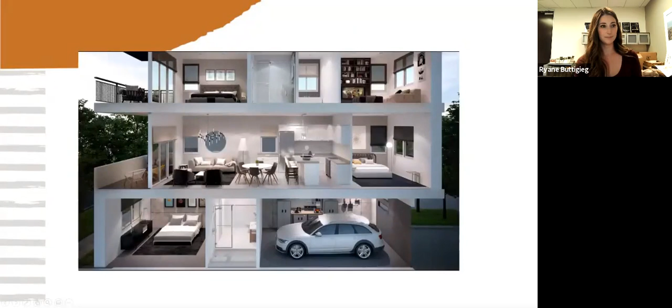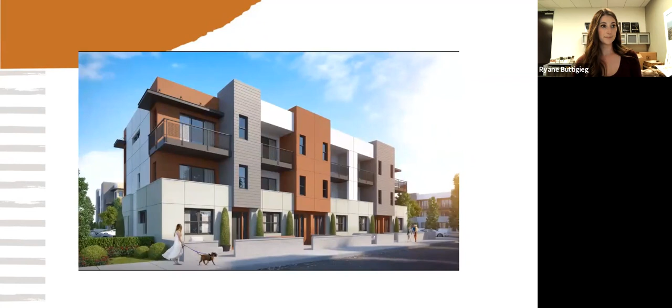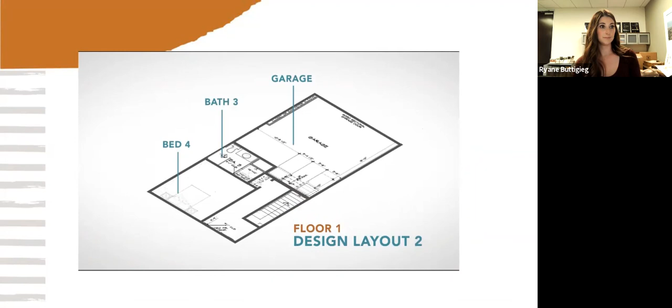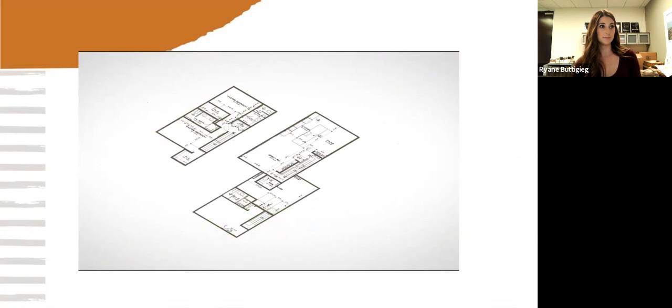We all have that perfect idea of home, a combination of this kitchen, that layout, every room and floor just how you picture it. Now imagine if you could actually have it. That's where Trumark Homes comes in. Introducing Truflex, a new design layout concept that's only available at West Village, Trumark's newest neighborhood, consisting of 62 townhomes coming to Central Park Village, just minutes from downtown Brea. It's what we call the convenience of choice. With no set floor plans, creating the home of your dreams is as simple as selecting a design layout for each floor. In other words, you can customize and build a home in your vision. That means no waiting for a new sales release to find your plan of choice, and a unique opportunity to get exactly what you pay for. Here's how it works. Step 1: select your first floor Truflex design layout from 2 options. Next, choose from 3 Truflex design layouts for your second floor. Then make the final decision for your third floor layout, choosing between 4 distinct Truflex design options. That's 24 different ways to create your dream home, in this exciting location minutes from stunning parks, trails, and prime shopping and dining spots. And it's all in your hands. It's our way of letting you embrace the side of yourself that lives boldly, and it starts with making your home yours. To learn more about these exciting customizable townhomes, please visit our website at westvillagebrea.com and join the priority registration list to be the first to receive updates on construction, product, and special events.

All right, okay, okay great. So let's start with the basics, because you have to understand the basics here to kind of follow along with what Carola, who's going to present the marketing and programming component, and then Rob, who's our ops guy, is going to talk about the construction part of it. The construction part's really important, but what you're seeing there is effectively the project being half built. You can see the part that's being built. And like a lot of the communities that we've done at Trumark, a lot of them are infill. We use a lot of words you guys have already heard, but we're going to get to the texture behind some of these words.

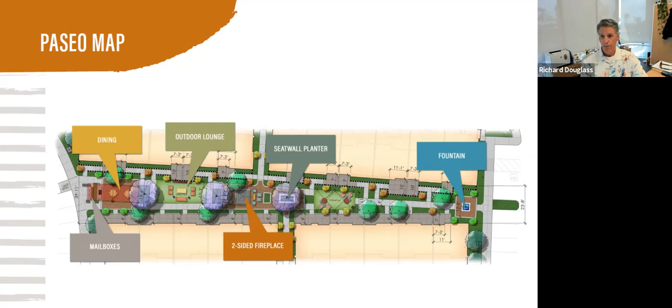Actually, one of the things that's on here that's not there, there's a picture of the paseo. I mean, it's cool, you guys see a lot of pictures. I'm not saying it's not cool in any way. The real thing we're talking about that you guys should be interested in is just how we put this product together. Now, I will add, if we go back to the site plan real quick, so go backwards.

Sorry, Ryan. The other thing we did here, again, modularized, panelized, on the upper right-hand corner where it says stacked flats. Those are affordable, moderate priced within the city of Brea. And we got 27 units per acre on those, and they're flats. Those are not a modular design, but they're still panelized.

So anyway, I'm kind of setting up Carola to talk about the programming here. Again, going back away from the stack flats into the yellow, oranges, greens, a standard 6-unit, 5-unit side-by-side townhomes. Every one of those little boxes you see there are the same exact size, same exact module. And yet when you walk in and she'll walk you through them, they're completely different in how they live and how they're infrastructured. That's for Carola and Rob to explain to you.

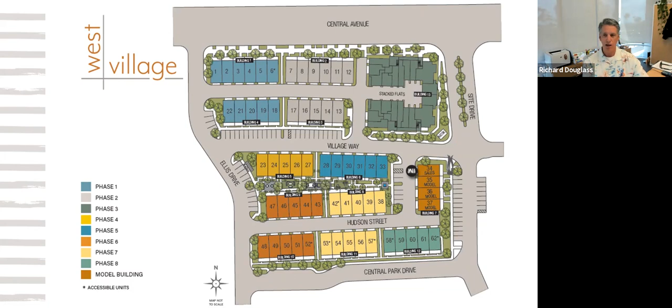But I'll start with something that was very difficult that we wanted to simplify and make it totally cool. That was the objective. Carol.

Thanks, Richard. So we talked about, somebody asked me the other day, well, how difficult was this to explain to the customers? It was a bit challenging to explain, but when we all sat together we said, well, how are we going to sell 62 homes that are identical? We thought, okay, we're going to have to figure out a way to differentiate them.

We had to change, and Rob will explain that, the thought process of the whole industry, basically, of all our vendors, our subs, and even within us, because we actually had 9 floor plans. There was no longer plan 1, plan 2, plan 3. We actually had 9 floor plans, and each buyer purchased 3 floor plans. So when we sat down with them, that was exactly what we did.

We sat down with them and said, okay, on floor 1, sorry about that, Ryan, you have 2 choices. You either have, which is pretty similar to every other 3-story town you ever see, the den or the bedroom. Now, another thing you'll notice in any of these plans is we have no ducts, because in order to be able to change, we had to do individual air conditioning units.

Rob can explain a bit more about that, because if not, we couldn't have changed the ducts, since we couldn't change the configurations. As you got to the second floor, people were able to choose, if they preferred, the kitchen at the front with the deck, or the great room at the front with the deck.

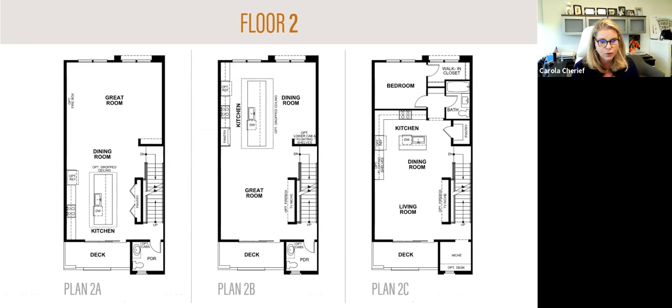So people really got excited about this, and were happy once they understood what it was, and they understood we were probably the only ones in the market doing such a thing.

What was also interesting, and difficult at the same time, for the salespeople and all the options, was that we priced these floors like they were options. We had no base price. We had a base price per floor that was actually entered into the system as an option.

That's how we priced the floor. So the salespeople had to know every time to go into the system, click on the options, and that would automatically give them the price of the entire floor plan they had chosen.

Another little problem we had was bedroom limits from the cities, because you can't just have as many bedrooms as you want. So they had to count per phase how many bedrooms they were selling. Luckily, by the end of the neighborhood, we sold out of all the homes and had only 1 bedroom left over.

So we did pretty much what we were supposed to do for the bedroom limitations. But that's something we had to think about up front, because if somebody had come in and sold only 4-bedroom or 5-bedroom homes, we would have run out, and in the end only been able to sell 1-bedroom homes. So we watched that very closely.

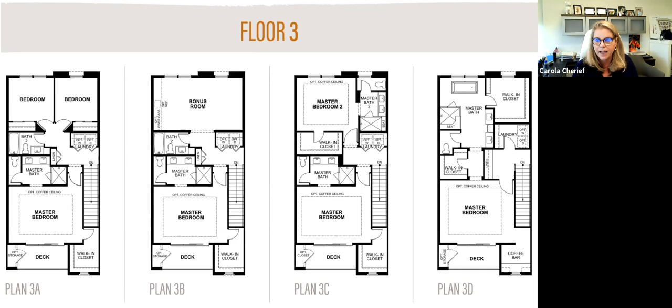Let me jump in real quick, maybe to set Rob up a little, just as an example. One of the principles here that we wanted to adhere to was having the infrastructure to do everything Carola just said — in other words, where the electrical plugs go, the plumbing goes, and everything else.

We basically said we're going to create an infrastructure plan to the most complex of these designs. For example, if you look at plan 3B on the top left, it's got the bonus room, and plan 3D has master baths and showers — there's infrastructure there. So in the case of some of this, Rob can explain, as long as we do the most complex plumbing plan first, with 84 or 94 examples of that, even though it's probably more than you'd ever want to do, we can tell the plumbers you're only going to make this one complex thing one time, and then it's repeatable.

And if there's plumbing behind those walls, we'll just bury them, in case someday someone comes back to retrofit their home and do whatever, subject to the parking and bedroom count. So the trick in all this is being able to pre-program as much of the infrastructure as possible so you can flex it a lot of different ways.

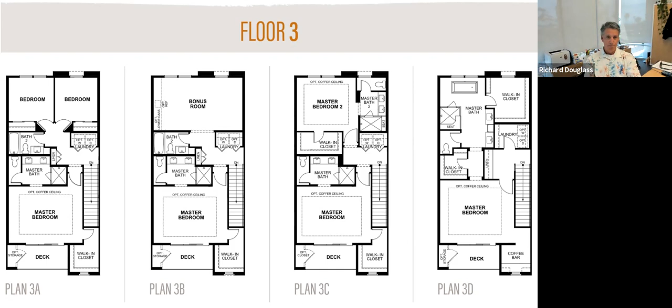So that sets us up. Oh, Rob, why don't you take it over? Okay.

To piggyback on everything that's been talked about, one of the challenges we have in Southern California is that municipalities want us to pre-plot all of our building units as part of the master plan, and then we're stuck with building that. So we have to have this crystal ball that tells us how many homes with 3, 4, or 5 bedrooms we need, and we get these approved years before we actually build, by which time the market changes. Usually most of us builders will have 3 to 5 floor plans, and one or two of them are a dog, and we end up discounting them to get rid of them because the market's changed from our original survey to when we actually build.

So part of the challenge of making these modular was to offer different configurations anywhere from 1 bedroom to 5 bedroom, without changing the exterior of the building. The city of Brea was very involved in the look of the exterior, so once we determined what it would look like, we couldn't change it from building to building along with the floor plans.

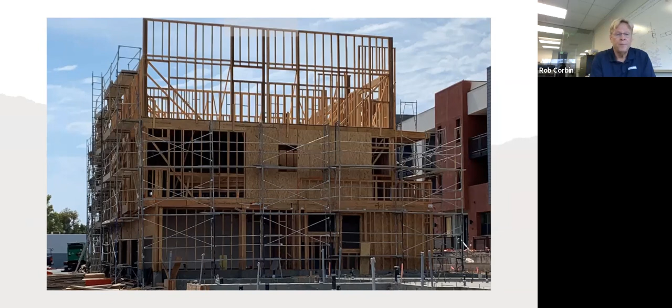And this did a number of things. The most important thing, and we've got, you can play this video, you can kind of see how efficient it is going up. You can play it and I'll just talk over it.

What it did was, normally when you start a building, you have a layout guy go out there and he lays down all the plate and marks where all the stud locations and all the cripples and all the jack studs and jam studs. And it's not always done consistently.

If my framer has a rough weekend, he might start on the left side one time and work towards the right, or he might start on the right side and work towards the left. And what that does is it changes your stud cavities.

So panelizing them, doing it offsite and doing it on a computerized basis, all of those interior partitions are consistent. We always knew that there'd be certain stud cavities for plumbing, certain stud cavities for electrical, and it never changed. That made it extremely efficient from putting things together on that side.

The challenge was the HVAC. 3-story towns are a challenge anyway, trying to get heat from the roof or cooling from the roof down to the first floor, trying to get it zone dampered, trying to get it balanced. So we went with the ductless system, and that worked phenomenal.

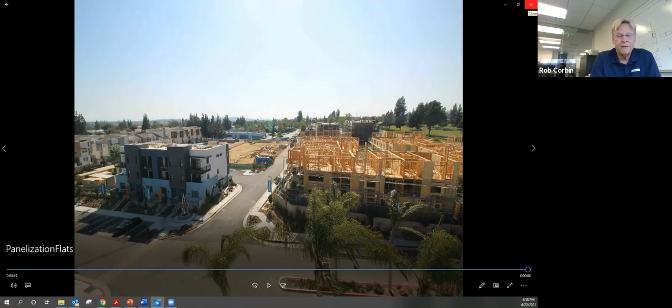So all of our floor joist cavities were in the same place. Running plumbing and running electrical was much more efficient. Go ahead, Richard. So when you hear him saying we panelized this and that, panelization is not new, but you can kind of follow what he was saying.

The one thing that is important to picture is before he did any of that, before any of that happened, they reduced the normal building drawings, if you will, to essentially a kit of parts. He was able, with our construction crews - there was a process we used called build it on paper.

Imagine it like anything else - if we went and bought a scale model, which no one does anymore, at the hobby store, you have a kit of parts and it says glue piece A to piece B. There's a whole schematic. They basically did that.

So why don't you talk about that, because everyone can talk about panelization, modularization, but there's a pre-programming and building-it stage that takes dedication and know-how. Why don't you talk a little bit about that?

Yeah, so how this thing went together was not typical of how we normally build things. How the parts and pieces fit, and what had to go when, and what preceded each step, was getting all mixed up.

And so we literally went into an office and took a bunch of sticky notes, and every task that we had to accomplish and every movement that had to be made on that job site was written down on a sticky note. Then we formulated our critical path on how this building was going to be assembled, and when we're going to breathe in and when we're going to breathe out, and when it was going to be done.

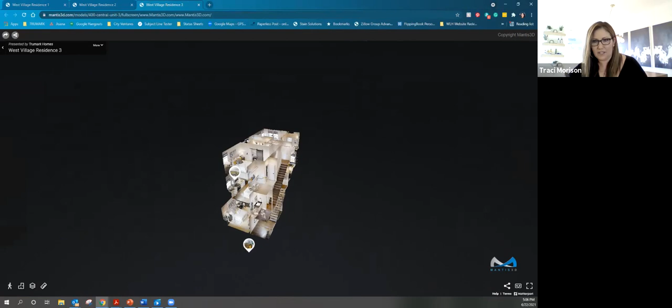One of the questions they asked was, how did I sell this? Because it sure could seem confusing, and I just tried to simplify it and said it's really a lot like building with Legos. You just pick which color you want on each floor and we stack it together. Everyone's like, oh, I get that, especially the millennial buyers, they could really relate to that.

Anywhere from 1 to 5 bedrooms, but it's still the same square footage, and they're like, wow, how do you do that? The floating staircase, by far, you get that ooh and ah right when you walk in, that first impression, they're so impressed. And when I tell them that's included, no way, their eyes get huge.

I can't wait to see more. So it was very fun to sell and easy to sell in the respect that it was exciting to talk about. So it wasn't easy, but it was exciting.

So some of the favorite floor plans, this one is the Model 3, and this had the bedroom downstairs. What was really great about this option is whether it was a bedroom with a wall, or a den without the wall, it still had a closet and a full bath with a shower. So it was super flexible, whether they decided to get a bedroom or not.

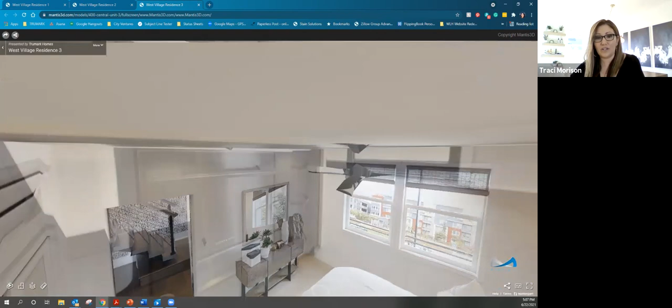It could still be converted into a guest room if it was a den or an office. People were really impressed with that, especially if they got a den and wanted to change it later. They had all the components to make it a nice bedroom, and it was a very good size, a pretty good size bed in there.

I'm in the B kitchen right now, I don't know if you can really see it behind me, but this living room space was the kitchen and the dining room. And there's this huge, probably 18-foot island that everyone's just like, is that included? I'm like, if you get the B kitchen, absolutely.

So it was 50-50, and it just kind of depended on their lifestyle. If they were more into entertaining and having dinner parties, they might want the B kitchen because it had such a wonderfully big island and a separate dining room. But if they were more like, hey, we're going to hang around the TV and watch movies, then they would do the A kitchen. They liked that, especially if they were barbecuing off the kitchen, they could have their barbecue right off the patio.

Going up to the 3rd floor, it was probably a tie between the traditional 3 bedrooms upstairs, but I think what really made us stand out was the dual master. Everyone loved the dual master because you could have 2 really big size bedrooms. Every community I've ever sold in, people ask, do you have a dual master? No, but we do here.